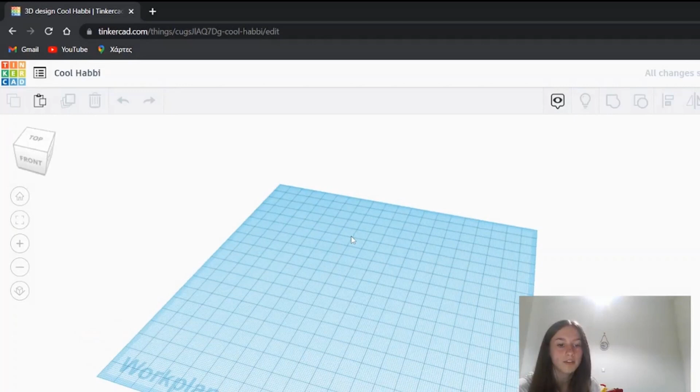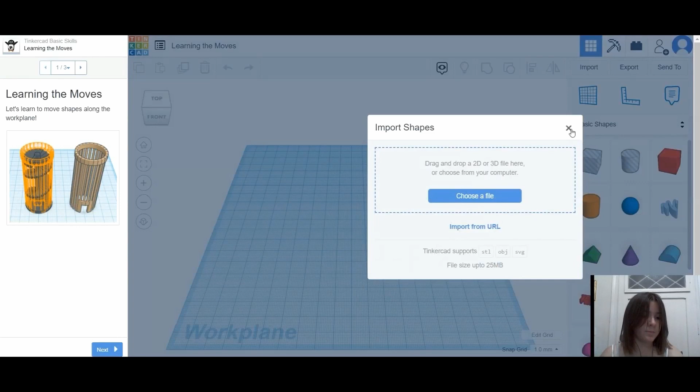From this panel, you can browse for many ready templates, from basic geometrical shapes to 3D text, letters, numbers, and much more. You can also use the import button above to start from any 3D project you have. Let's start adding any basic shape. Just select it and place it on the preview with your cursor. To drop it correctly, you can right-click and drag to 3D rotate and use your mouse wheel to zoom in and out.

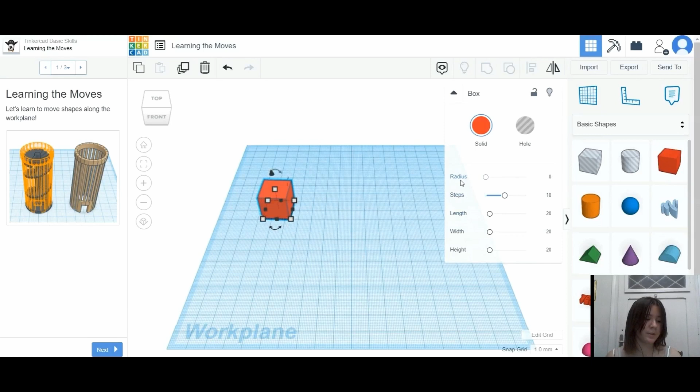Once the object is placed, you can click on it to select it and adjust its properties from the dialog box on the right, such as radius, smoothness, length, width, and height. You can also click on Solid to select its color and transparency level. You also have the Hole option, but we will see this one later. Other templates can work differently.

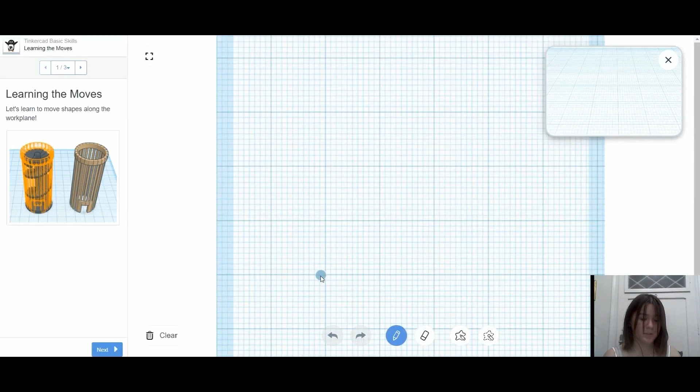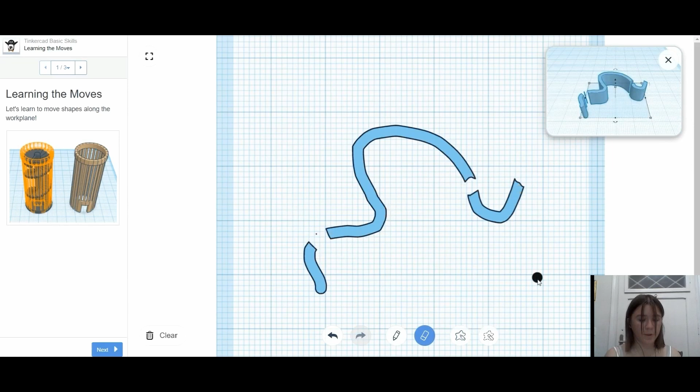If you drop any scribble, the workspace changes in order to ease your brush on a 2D environment. You can always check its result in the top right corner. At the bottom, you can use the Erase tool to remove any brush and the Shape tools to either brush or erase complex shapes by varying the current radius. Use Done to apply all and come back to the main workspace. If you see that the camera is not centered on the current object, use the F key.

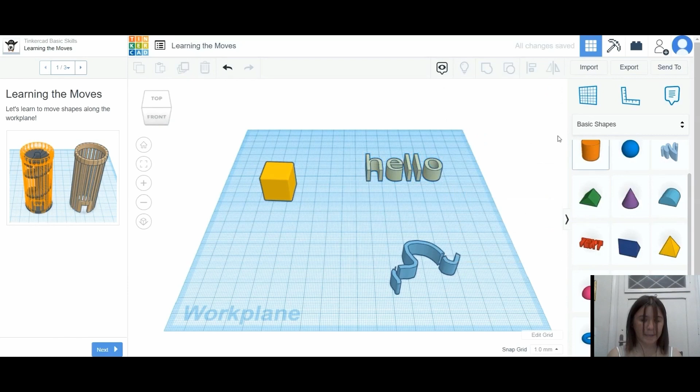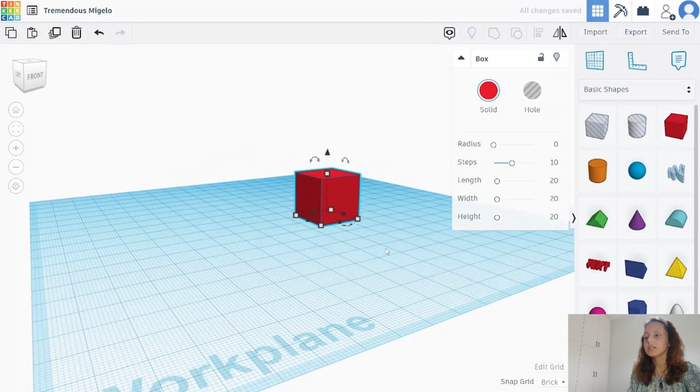Select Text to drop any 3D text, then adjust color, text content, and its font on the right. Other templates, such as the ring, give you the possibility to customize each section as you like. Now, let's see how to edit these objects. Select any, click and drag to move it. Consider that the object remains attached to the ground here, represented by the blue work plane.

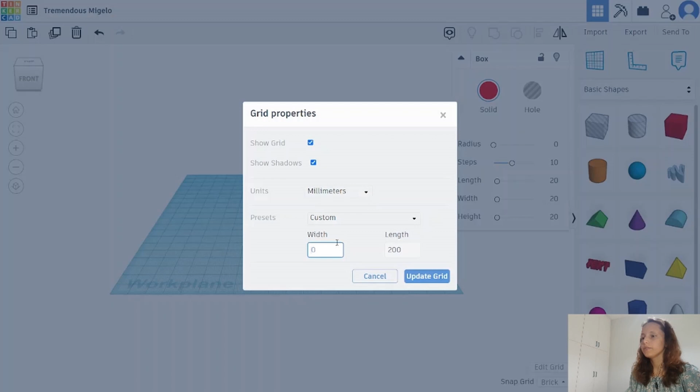Tinkercad also gives instant measurements starting from the dashed object base and taking the unit defined from Edit Grid in the bottom right corner. You can choose millimeters, inches, and also resize the main blue work plane if you need some more space. You can also move by holding down the Alt key to make fast copies from the current object. If you make any mistakes, you can use the Undo and the Redo buttons to undo and redo actions, or the Delete button to remove the selected object.

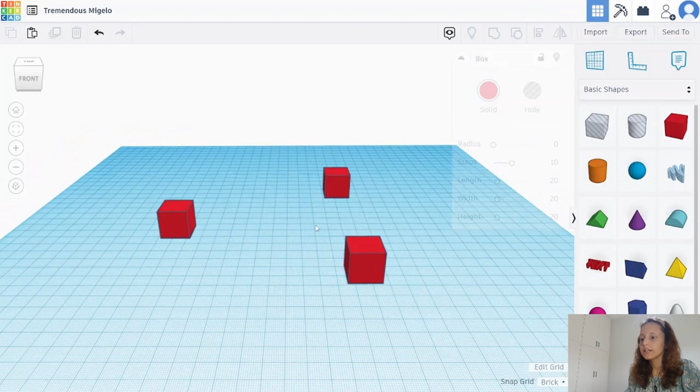You can also edit the object using its nodes. Hover over these to get instant measurements on it and drag from these to resize or rotate. Use the white nodes to resize freely, holding down the Shift key to save the original aspect ratio, whereas use the black ones to resize through a single direction, and the black cone on top to adjust the height in respect to the ground work plane. You can also use the arrows to rotate through the internal or external circle to change the rotation snap.

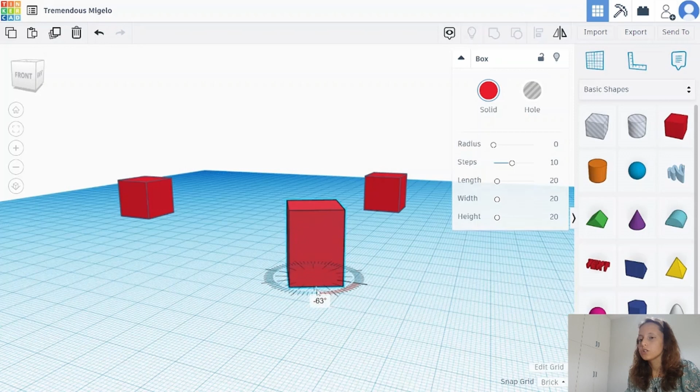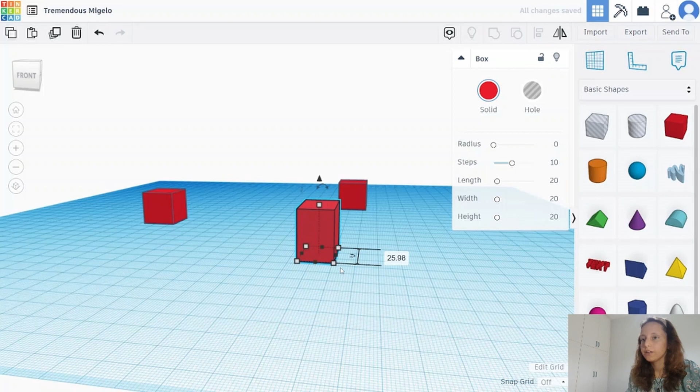Also, when you move and resize, Tinkercad applies snappings by following the work plane grid. You can adjust this or turn it off by going to Snap Grid in the bottom right corner. You can also use the R key to drop any ruler. This can be useful to take any relative distance under control.

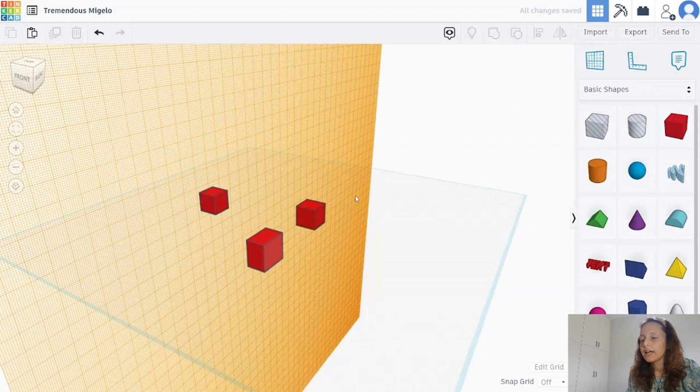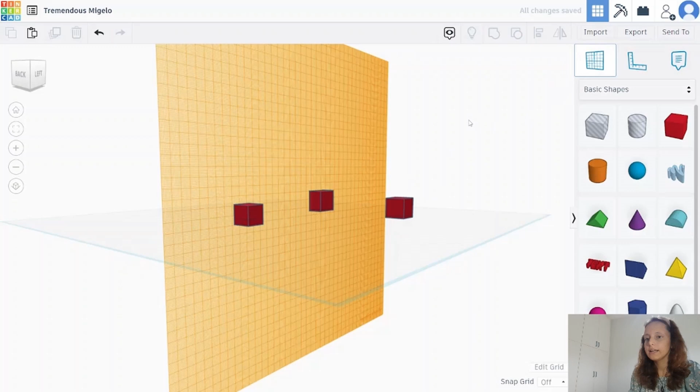The work plane is a very important element, fixing the reference plane to take when moving or editing. If you click on Work Plane and then on any object face, this will be taken as reference, becoming a work plane in orange color. At this point, any action is made by taking such new plane as reference, easing the design progress and taking everything under control thanks to the blue projections on it. You can come back to the original work plane by enabling Work Plane and clicking on any empty space.

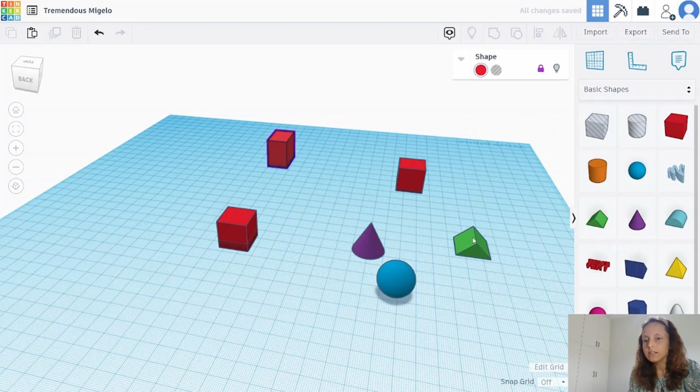As you start getting lots of objects on the project, you can manage these with two buttons in the top right corner. The first one locks the object, preventing any modification on it, and the second one hides it until you click on the light button above.

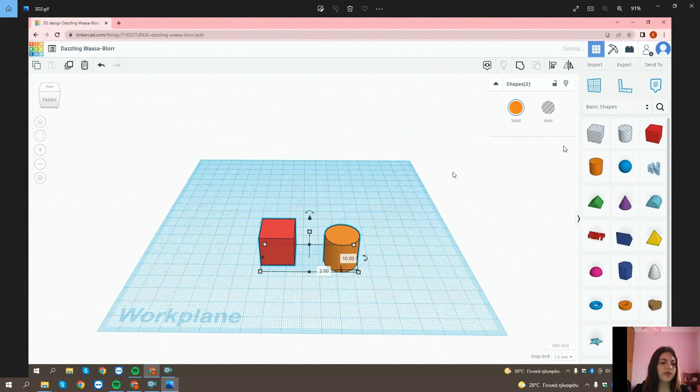Now, let's see how to design complex object shapes. If you click and drag over the interested objects, you will select these all together so that you can move and edit them in the same way. If you also click on the Group button, you will create a unique object from these. This allows to make complex shapes in case you have these objects overlapped. You can undo all using Ungroup.

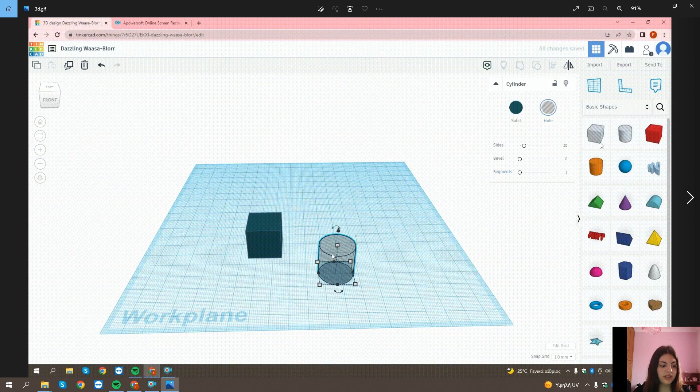Moreover, if you set any object as hole and group this object with a solid one, you will subtract the first one from the second one. This way you can extract complex shapes in no time. Always use Ungroup to undo.

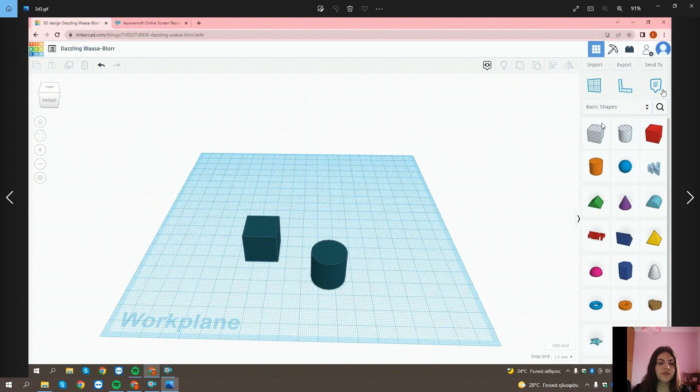Check this out. Your project gets saved automatically by Tinkercad at each step. You can also use Send To to share your project on forums or on Autodesk Fusion. Another useful feature is the possibility to click on Notes and then on any object to type in. As you work on the project, make sure to check it from different perspectives with the 3D view cube. You can also take a look at your project in a Minecraft or a Lego blocks world.

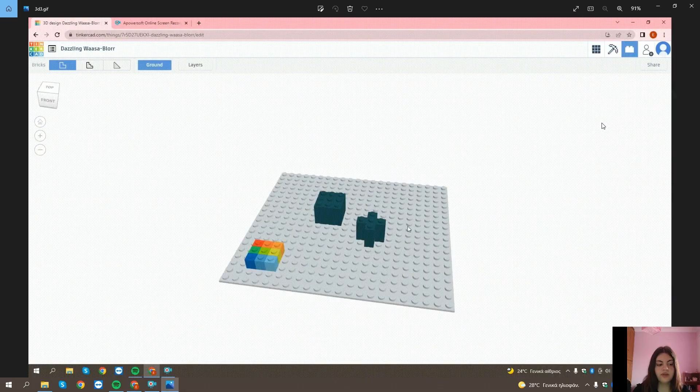If you return to your account dashboard, you retrieve all your projects made on Tinkercad with a fast preview. You can click on any and select the download button to export your 3D project in several formats for 3D printers, including .stl and .obj. You can also export as .svg to make 2D laser cuts.

Moreover, you can make code block projects to make your design animated. By dragging and dropping actions in the correct order, you can make and edit objects or calculate math to process operations. The result is an animated flow from shape creation to its animation from start to finish.

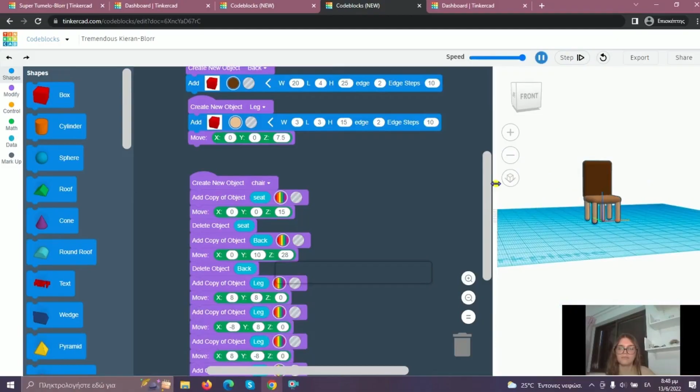This is all you can do with Tinkercad. To get more help, make sure to take CAD lessons from Tinkercad, either from the dashboard or the dedicated Learn page. Inside Gallery, you can also pick and start from any project made by the Tinkercad community.